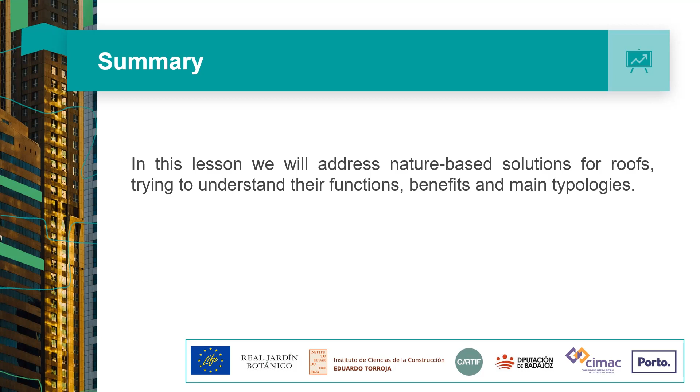At the end of these video lessons, we hope that everyone will be able to recognize the main functions of the roofs and their importance for the regulation of the indoor environment, distinguish the several types of green roofs, and identify the main advantages and benefits of nature-based solutions for rooftops.

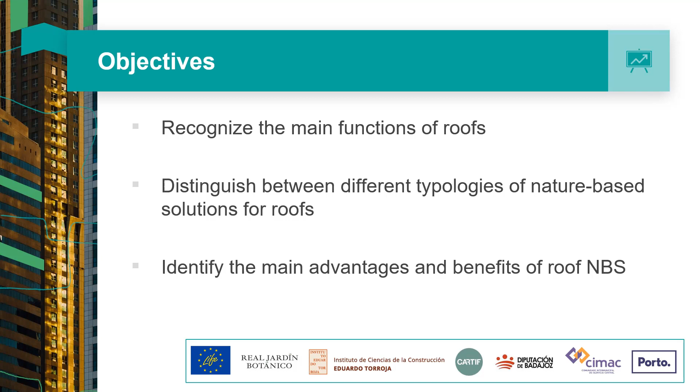The history of the roof goes along with the history of man and its evolution. From an early age, men realized the need to protect himself from climate, natural disasters and dangers, as well as to shelter from the cold and heat. The man began by sheltering in caves or small cavities in stones or escarpments, and later was able to build his own refuges, starting with simple huts with branches and leaves, using natural resources he had at his disposal.

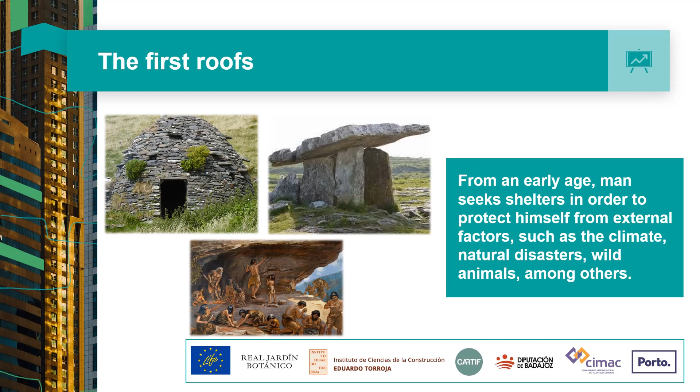In the search for shelter and protection, and using the existing natural resources, man was able to innovate and began to put living vegetation on the roofs as a way to soften the interior temperature. The placement of landscaped structures on the roofs dates back to the earliest records of the ancient civilizations that populated the Tigris and Euphrates rivers, with the famous hanging gardens of Babylon in the 7th and 8th centuries before Christ. The warm and dry climate characteristics of these regions contributed to the appearance of these innovative solutions.

However, later, the Romans also sought to implement this concept in their buildings, mostly associated with hot and dry climates, with vegetation contributing to shelter from the intense sun and soften the indoor temperature.

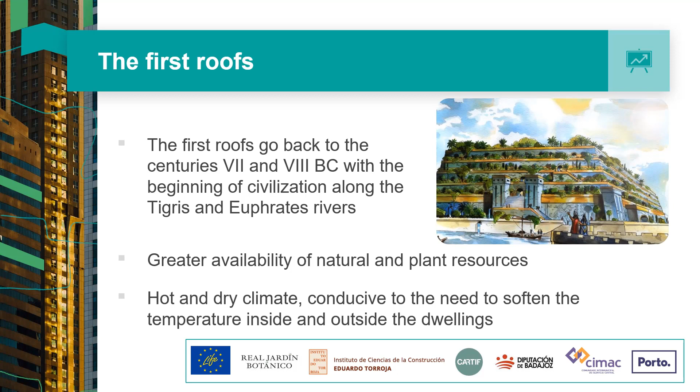With the discovery and development of materials, man was able to make the construction process more complex, giving rise to increasingly elaborate roofing models in materials and forms, opting mostly for sloped solutions in order to avoid water infiltration and accumulation of debris on the surface. We often see sloping roofs around the world, given the ease of water flow, offering itself as a practical and simple solution, and without great maintenance requirements.

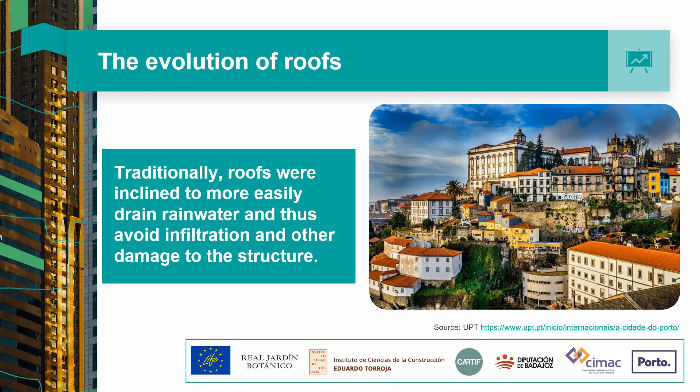More recently, and with the development of lighter and longer-lasting construction materials, it was possible to resume the option for flat roofs, enabling the use of the roofing area for other purposes. The roof began to have a function in addition to protection and safety, and began to have a useful area that can receive and accommodate a set of equipment and service infrastructures, essential for the quality of life that is intended.

However, the constant demands for comfort led to an overuse of heating and cooling systems with high energy consumption while devaluing an important available area, the flat roof. The scarcity of available space in cities has led to the development of solutions for efficient use of the rooftops, enhancing a more profitable use for the users without neglecting the essential function of the roof.

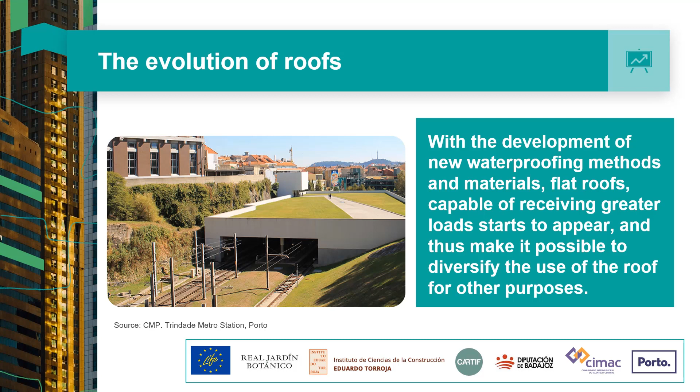Thus, as essential functions of the roof, we have waterproofing, thermal insulation, sound insulation, protection from climate impacts, and the safety of people and goods, among others. But we can certainly identify these as the main requirements that we expect a cover to have, whatever the material, shape, or layout.

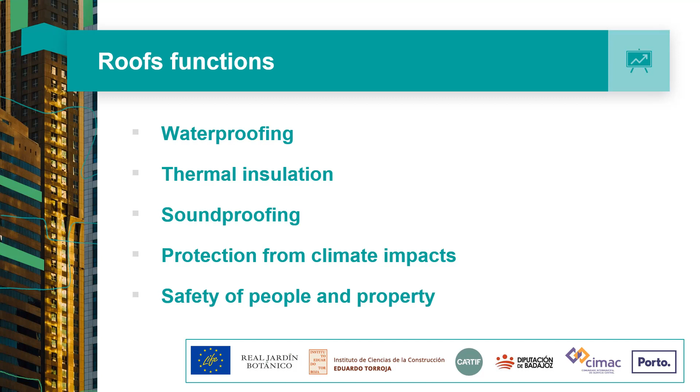But it turns out we have seen a growing number of green roofs a little everywhere, with different degrees of inclination, with different volumes of vegetation, with various shapes and different uses. Undoubtedly, some factors contributed to this democratization of green roofs. The densification of flat roofs or low-sloped roofs enhances the fixation of the substrate to the cover slab, allowing plant species to grow and develop.

The demand for greater energy efficiency. As we will see below, there is a greater demand for energy efficiency of the buildings by looking for more effective, long-lasting and low-cost thermal insulation systems. The green cover with these multiple layers contributed to a greater thermal protection of the building materials, ensuring a lower thermal amplitude inside the building, and thus ensuring more constant temperatures with low losses.

A greater demand for more sustainable materials and resources. Currently, there is a greater concern with the sustainable use of materials and resources, and with its ecological footprint. We are witnessing the emergence of innovative materials that incorporate recycled or used materials.

The need to adapt to climate change and the increased risk of extreme weather events puts additional pressure on the roof, particularly in the level of insulation and waterproofing, forcing them to deal with ever-increasing thermal amplitudes as well as abnormal rainfall loads. All this has contributed to increased interest and bet on solutions for green roofs.

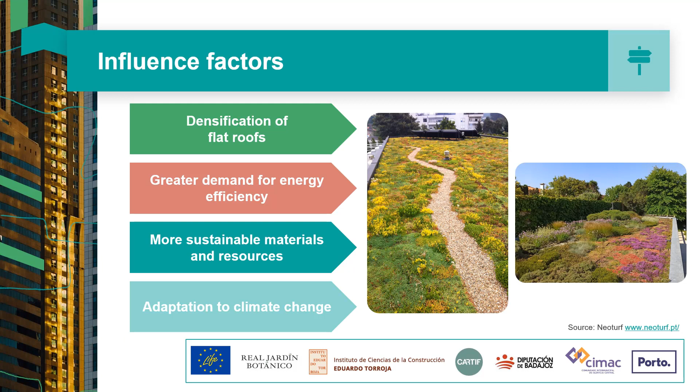Among the types of green roofs, we can distinguish between the extensive and intensive, and there is an intermediate solution called semi-intensive, as you can see below. But it turns out that it is common to classify only between extensive and intensive, inserting the semi-intensive ones in one of these typologies.

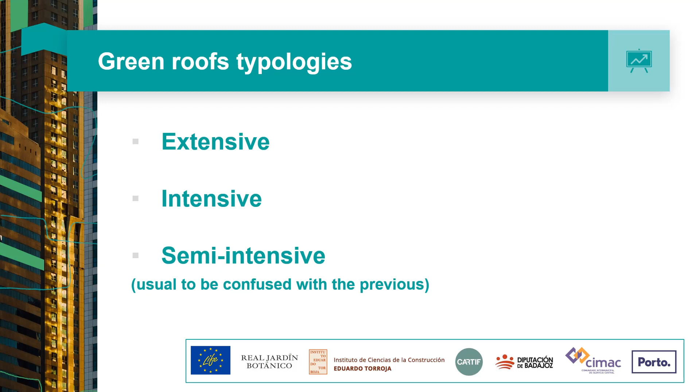The extensive green roofs are characterized by presenting layers of substrate with little height and by the use of small vegetation. They are usually less demanding in terms of maintenance and present low variety of species.

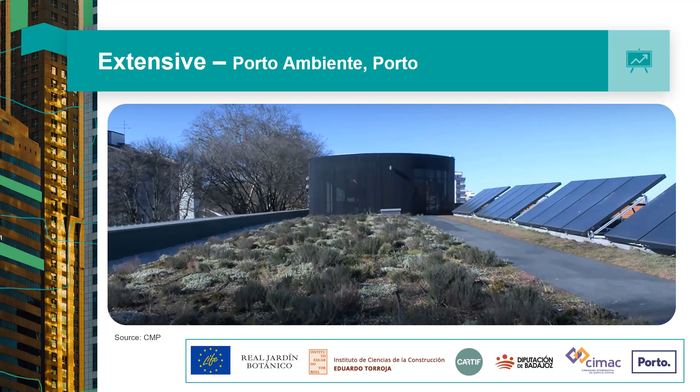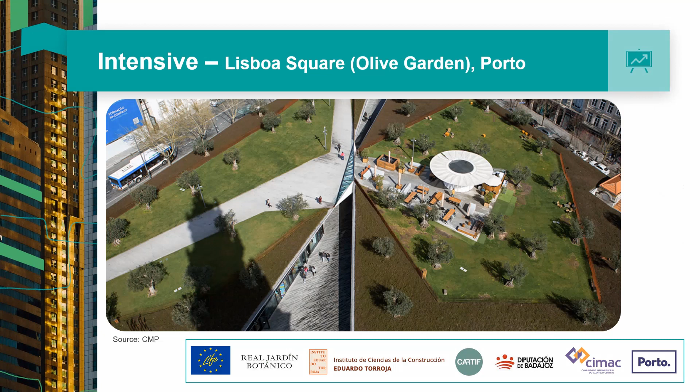On the other hand, intensive green roofs present themselves as true hanging gardens, with a great diversity of species with different sizes. They have considerable substrate heights, capable of accommodating shrubs and trees, and are suitable for spaces for frequent use. The semi-intensive ones are included among these typologies, presenting characteristics typical of both typologies.

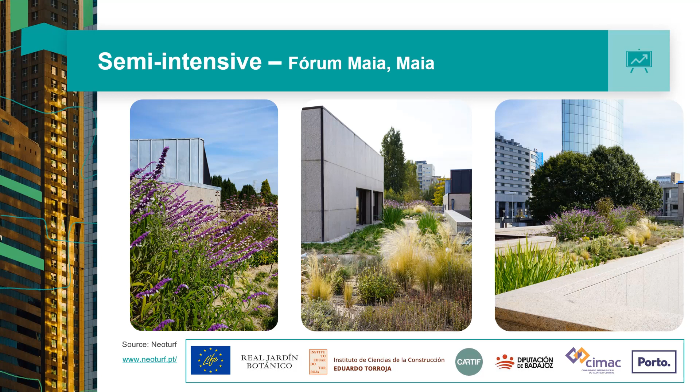In structural terms, the green roofs are organized by layers, with distinct functions and with a greater complexity in relation to the natural soil. The green roofs have the following layers on the cover slab. Waterproofing layer. This new layer on the slab improves and strengthens the impermeability of the structure, since it will have to deal with the accumulation of water in the substrate, making the environments on the slab wetter. This layer allows to keep the slab free of moisture of any type of infiltration.

Anti-root layer. The existence of vegetation will create a network of roots that may break through the waterproofing layer and damage the cover, compromising the viability of the structure. This root-resistant layer protects the waterproofing layer as well as the slab below, avoiding any damage and keeping vegetation away from the cover. Drainage layer. This layer is composed of alveolar elements that ensure the flow of water, preventing it from accumulating in excess in the substrate and causing damage to the vegetation.

Filter. On the drain layer is placed a filter in order to allow the passage of water, retain the substrate and all sediments. These layers serve as the basis for the substrate, covering an entire infrastructure essential for the correct installation of a green cover. Substrate. On the filter is finally placed the substrate that will support the vegetation. This layer may consist of a mixture of different materials to ensure the correct circulation of air and water in the substrate. Vegetation. Finally, the vegetation that will create the landscape and provide the desired benefits is placed above.

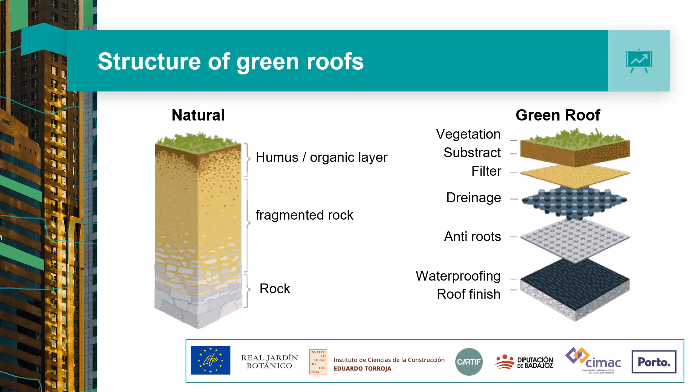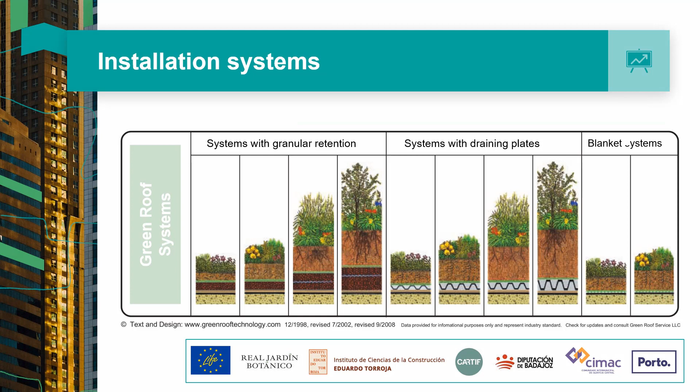The choice of the green roof typology that should be installed must take into account not only the load capacity of the coverage, but also the service of the ecosystem we want to see implemented. Green roof crops provide more benefits and services of ecosystems, depending on the greater diversity and complexity of vegetation, which is usually dependent on the height of the substrate. In this sense, roofs with higher load capacity can accommodate higher substrate heights and consequently receive a greater diversity of vegetation. However, when opting for a green roof one should weigh many factors, including the viability of the structure, the drainage, the climate characteristics, because all options have various environmental, social, and economic benefits that will benefit the building and the users in many ways.

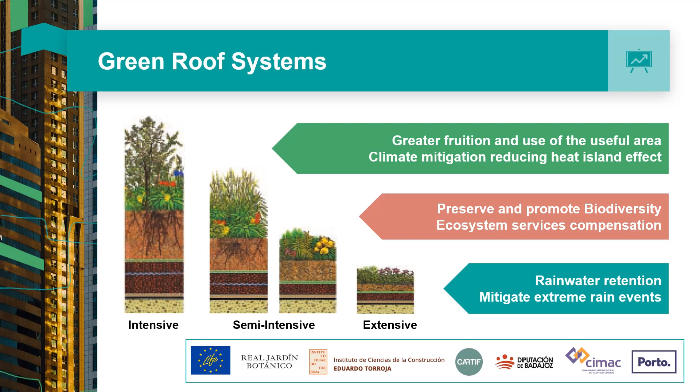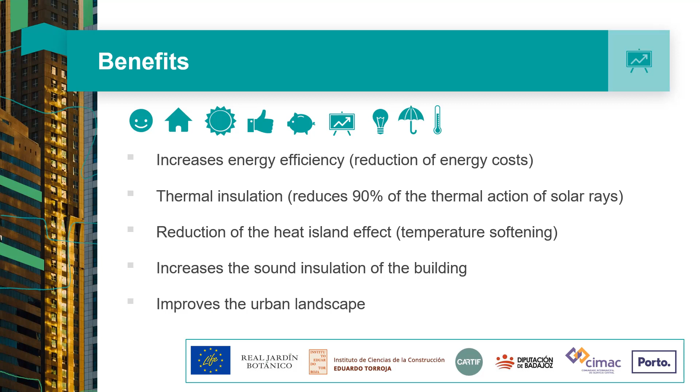Among the many benefits that green roofs present, we can highlight: contribute to increase the energy efficiency of buildings by improving thermal insulation and thereby promoting the reduction of energy costs. Improves thermal insulation and increases coverage durability by reducing the thermal action of the sun's rays on the cover by about 90%, protected under the vegetation layer. Contributes to reduce the heat island effect due to the presence of vegetation that creates a cooler and wetter environment due to evapotranspiration. Increases the soundproofing of the building due to the multiple layers that make up the green roof. Improves the urban landscape by coloring the roofs and filling the surface with life.

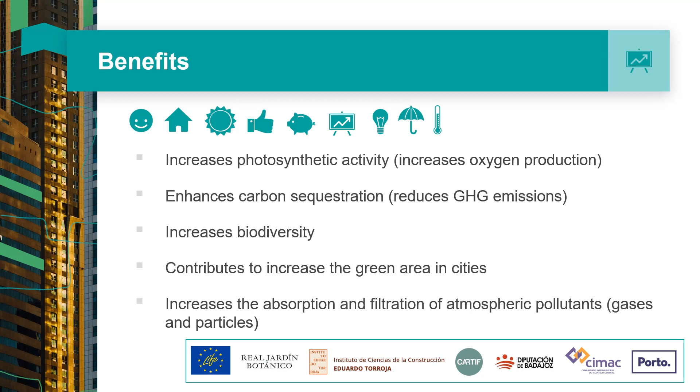They also contribute to increase photosynthetic activity and thus contribute to oxygen production while promoting carbon sequestration, thereby reducing emissions of greenhouse gases. Promote increased biodiversity by promoting habitats and providing food and shelter to various pollinators. Contribute to the increase in green and permeable area of cities. Improve air quality by absorbing and filtering air pollutants. Also reduce the risk of fire through floristic compositions; roofs including succulent plants slow fire spread. Contribute to reduce costs of maintaining buildings by increasing the durability of the roof and protecting it from the action of atmospheric conditions. Increase the useful area of the building, creating areas that can be used. Contribute to the integrity and sustainability of the urban drainage system through water retention in the substrate.

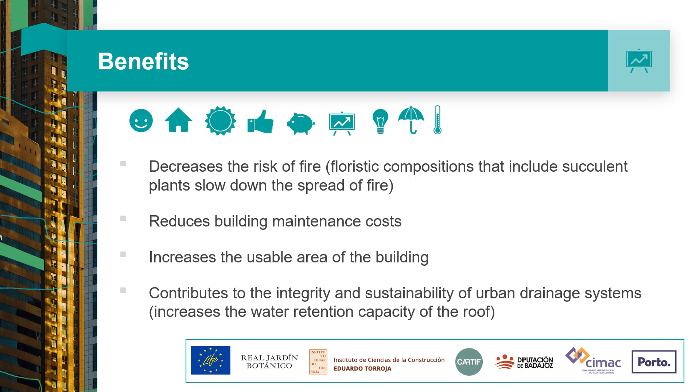Green roofs are a valuable solution for buildings, regardless of their use or function. The municipality of Porto is committed to the use of green roofs in municipal buildings. An example of this is the intermodal terminal of Campanhã, a structure with 4 hectares of green roofs, which allows the creation of public green spaces while promoting the efficiency of infrastructure and increasing the durability of the roofs.